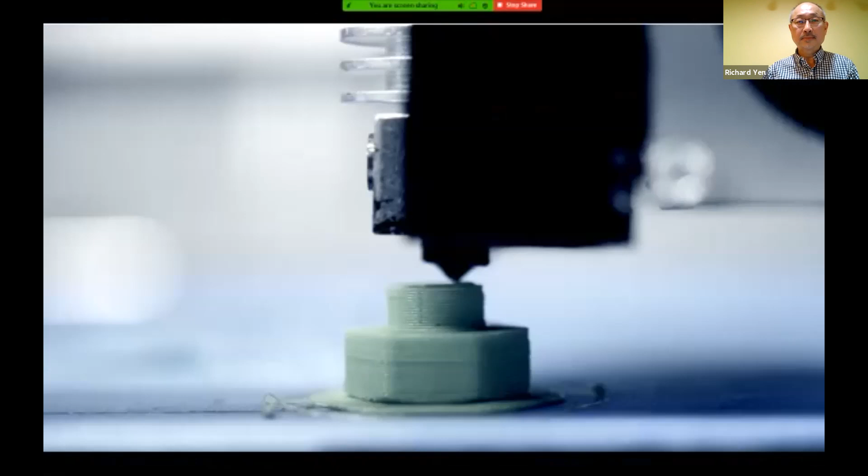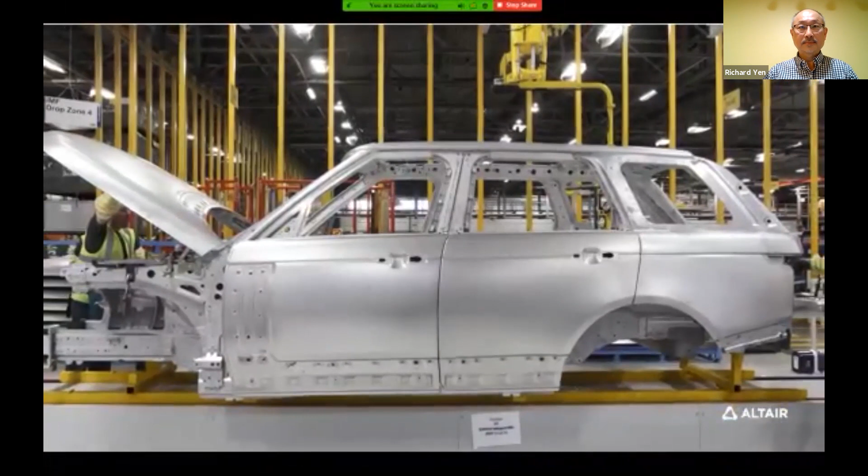I like the title Enlighten, because it enlightens us on new technologies. They're like a peer to me and to my engineering colleagues. So it's even more of an honor to have a group and a company that's made up of engineers give us an honor like this. It's important for automotive companies to reduce vehicle weight because not only do we want to give customers the cars that they want from a ride and handling point of view and an enjoyment point of view, we also want to give customers cars that meet the sustainability challenge and get better gas mileage and better CO2 reduction.

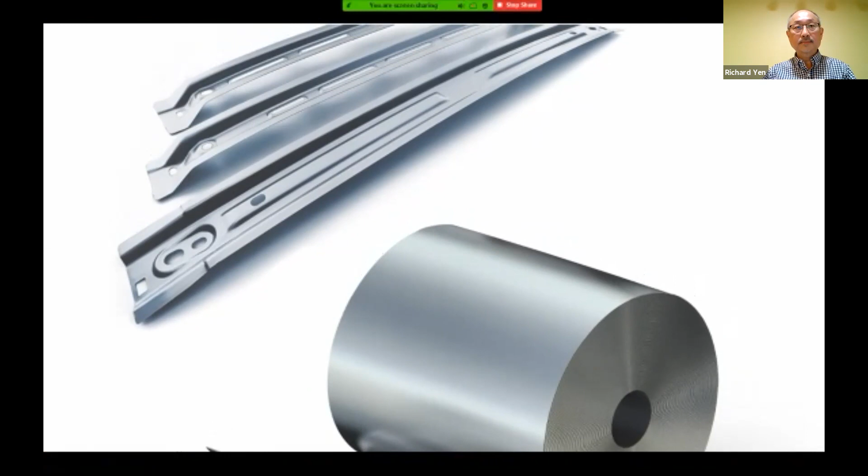We consider the Enlighten Award as the Oscar of lightweighting. So for us, we've been following that for years. We are going to brag about this to all our customers. We're putting it on our website. We're very proud of this. We have the CEO here today. So we're going to really brag about winning this award.

Thank you. So quickly, just run through today's agenda. I will use very little time to introduce Altair, then I will pass on to the panelists to talk about their stories. Today's topic focuses on the future of lightweighting and enabling technologies. Everybody understands that in order for the carmakers or OEMs to build beautiful products and really focus on lightweighting, we do need people who have a vision, and we do need the technologies to enable the OEMs or suppliers to do the lightweighting design.

With this in mind, the goal for this meeting is to run through the roundtable discussions and allow the participants or audience to ask questions. So we have all the panelists here that can answer your questions.

Just quickly to go through who is Altair and why we are doing the Altair Enlighten Award. Altair is a global technology company, and we really help customers make design decisions by leveraging the convergence of simulation, high performance cloud computing, and artificial intelligence. There are 6 pillars that really support Altair's growth, and AI is one of them. We use data analytics to build machine learning models or AI models to help the design.

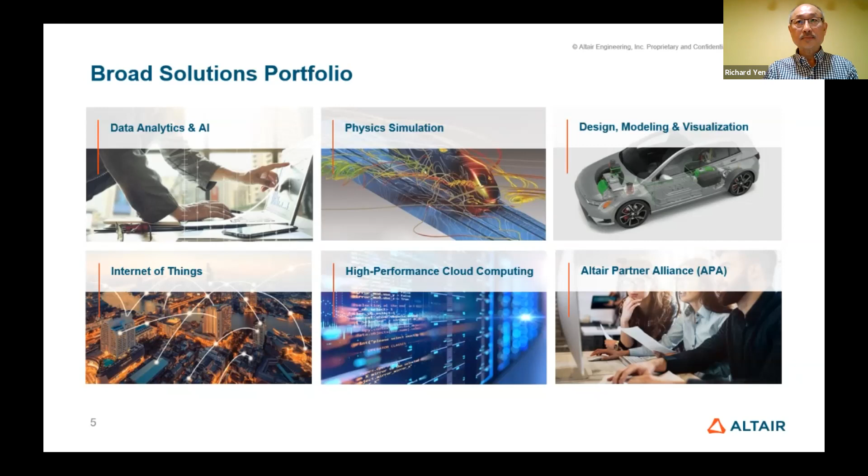So for the Altair Enlighten Award, like I have stated previously, this is the 9th year of the Altair Enlighten. We are happy with this and working with Carl. Please visit our website, the Altair Enlighten Award web pages, to look at more information. And I would like to point out that the entries close by end of May 31st. Then we have judging on June 22, and then we deliver the award on August 4th.

For this year, we try to support the government's green policies, and we believe the environment actually is more important than the lightweighting, and lightweighting is one of the important elements to support sustainability. So we added 2 new categories here. One is sustainability products, which allows the OEMs or suppliers to really focus on where they see energy efficiency, gas emissions can be saved, can be reduced, and where lightweighting can apply and increase the safety and the performance, etc.

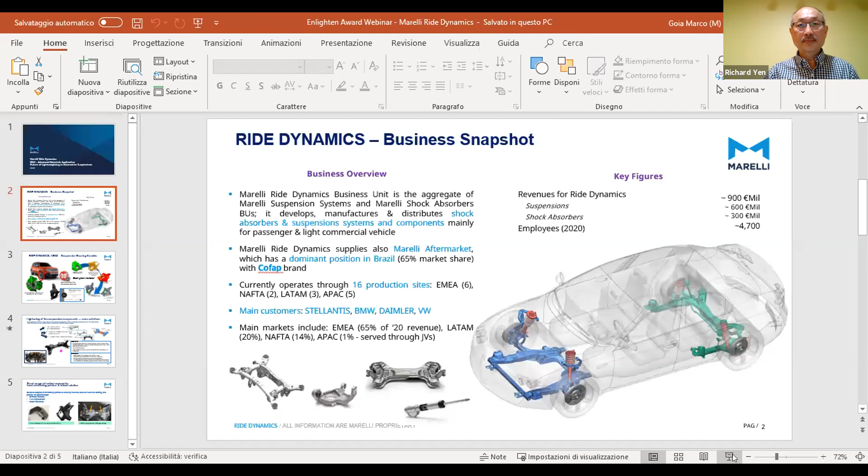Yeah, sure. So let me quickly share a few slides that will help us in discussing. Can you see my desktop? Okay. Yes. Yeah.

So as we said, Ride Dynamics, very briefly, is one of the independent companies belonging to Marelli Holding. It is the aggregate of the former business lines called suspension systems and shock absorbers. So we develop, manufacture, and distribute for high volumes, for any kind of automotive car maker, both shock absorbers and suspension components, suspension systems, suspension modules.

In brief, our global turnover is around 900 million euros, distributed 2/3 on suspension, 1/3 from shock absorber operations. We have a very strong position especially in Brazil for shock absorbers, while in general 65% of our revenues come from European operations, and our main customers are Stellantis, BMW, Daimler, and VW groups. Stellantis both by the former FCA group and by PSA, because we are historical suppliers for both sides of the newly created Stellantis.

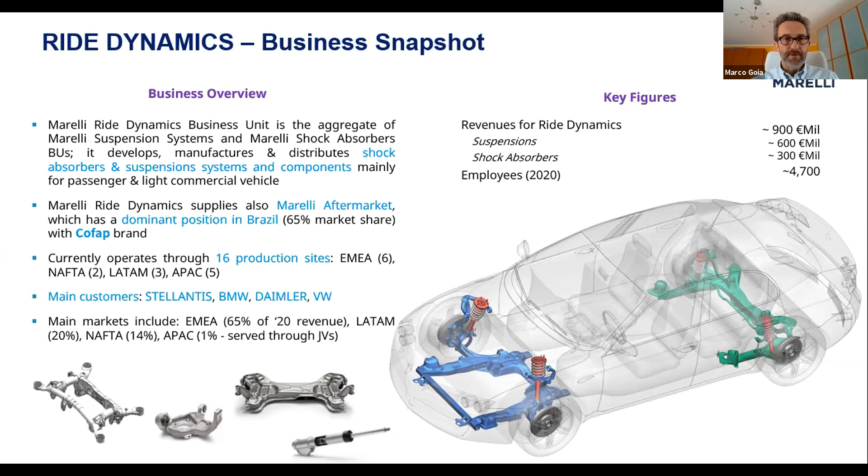Okay. So quickly, our participation in last year's Altair Awards, where we won in the future of lightweighting category. We tried to challenge ourselves with probably the most complicated component of the suspension system, the steering knuckle. The steering knuckle is where all the loads come from. The transmission of the loads from the wheel to the body passes totally through the steering knuckle. So concentration of loads, very critical design space, and so the critical side of weight reduction is totally concentrated in this component.

We ran through a deep topological optimization, material selection, and before and besides these jobs, there is a deep study and understanding of the materials, together with our partners of prepreg materials. By adopting vinyl ester and high percentage carbon fiber SMC process, we defined prototypes, and we completed the prototypes where we were able to reduce between 25 to 30% of the weight with respect to an aluminum knuckle.

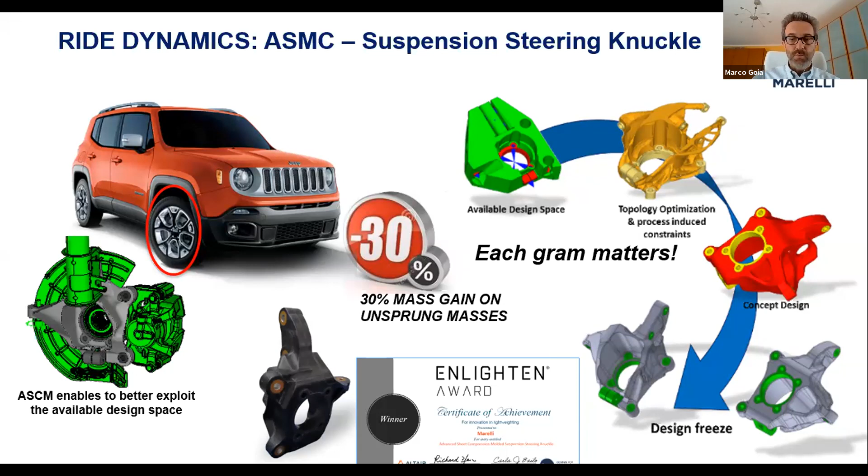And so this led to this very interesting award, and we are very proud of that award in the future of lightweighting category. But we never stop, and as I said, we are not concentrating only on the steering knuckle and only on one solution, because we believe as a suspension systems manufacturer that the mix of different solutions is the winning strategy for the future.

So we can reduce the weight of our suspension by adopting, for example, starting from the hot forming steel plus tailor-welded blank steel, just to have the thickness exactly where it is needed. Then we have solutions where we cut the weight by means of aluminum variable thickness sheet metal structures welded together. And when we want to propose to the car makers the ultimate, so the maximum weight reduction, we need to adopt carbon fiber reinforced plastics.

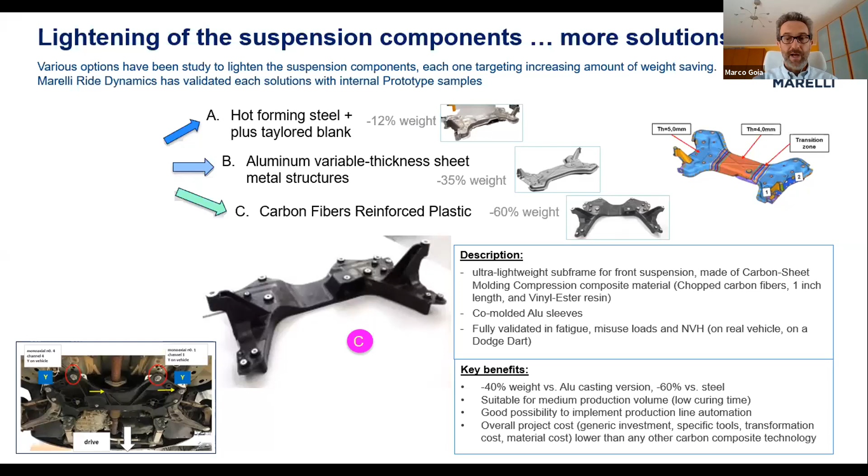So, for example, for these structures, we have developed and defined in the past years a front cross member that has been actually tested even on a car by ourselves and totally validated on the bench test with very good results. Finally, we achieve a 60% weight reduction with respect to the steel versions and 40% with respect to aluminum versions. So this is what can be done by a complete redesign of the parts.

But which are the next steps? Because we said future of lightweighting, but the future sooner or later will come. So when the future comes, you have to be prepared for the next futures. And so now we are studying local reinforcement by applying local patches of carbon composite materials onto existing structures like aluminum knuckles, or in some cases onto our structures developed in SMC, to increase locally certain specific performance, like for example on the knuckles the static stiffness and longitudinal collapse load on these cross members.

So this was just to give you a very quick idea of our participation. I want to remember that last year was not the first time we participated in these Altair Awards. Last year we won. The previous year we were just participating, but it's very important to start this path also for my people in R&D.

Okay. Thank you, Marco. Really exciting to see this. But I'm seeing you are applying more and more applications in the chassis, in very critical components, and how do you convince the OEMs to really follow this path?

Well, it's the tough side of our job, even more difficult than making the research itself. In our domain, the safety-related component domain, deep knowledge of the materials is the key driver. And so having an internal material laboratory is important to have the material card as precise as we need from a CAE perspective, but also from a testing perspective. For example, a deep fatigue campaign to have the fatigue curves and characteristics of our materials, even at different temperatures, is something we show to our customers to convince them to introduce composite materials in chassis domains. And also, to convince customers, a key factor is to propose not just one solution, but several solutions depending on the key drivers of each platform.

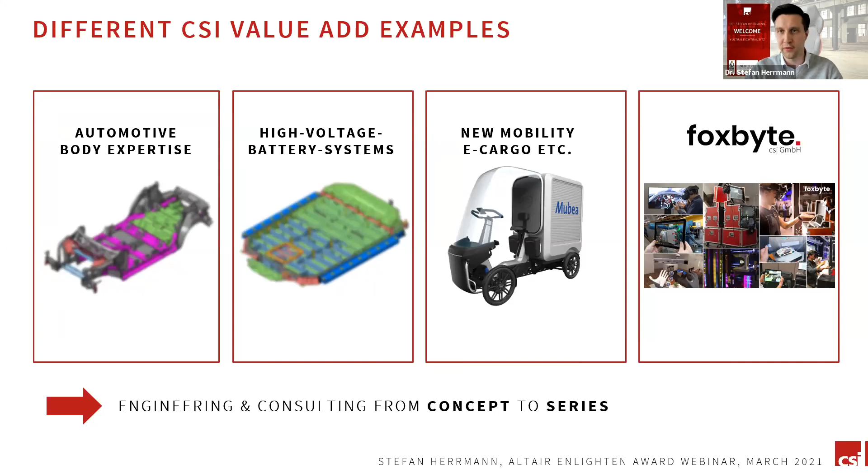And another business unit that we have is Foxbyte. They mostly deal with augmented reality and virtual reality solutions. So let's call it extended reality. So let's talk about the lightweight. We were presenting the Ultraleichtbausitz. It's a German word, which basically translates to ultra lightweight seat.

It was a partner project with different manufacturing companies like Alba Tooling, Automotive Management Consulting, and CSI in that case was in the lead. And also different companies like 3D Core suppliers, Covestro that you might know, Hofmann, and also the Lightweight Technologies Forum, for example.

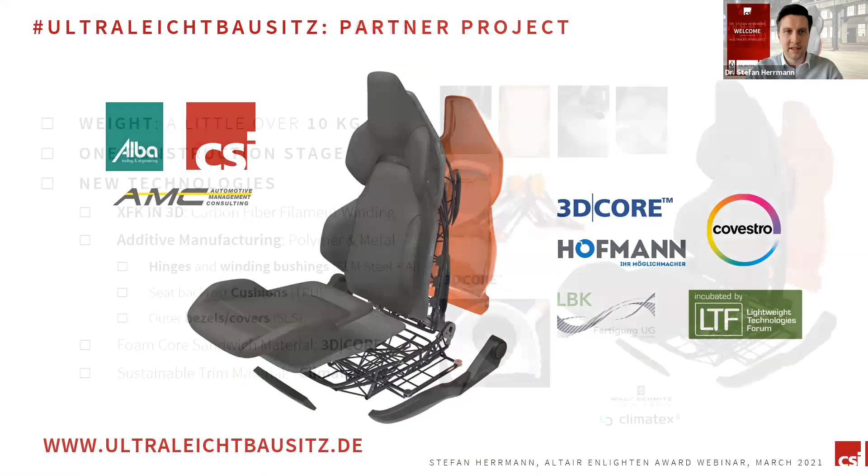So let's talk about the facts about the Ultraleichtbausitz that we did. So the weight of that seating concept was roughly a little bit over 10 kilograms. And we completely rethought the way such a seat could be designed in a completely digital process chain, majorly CAE driven in the static and dynamic domain.

It was constructed in one construction stage, and basically the new technologies that we featured were carbon fiber filament winding. So the whole seating frame has been designed from carbon fiber filament wound products. We had a lot of additive manufacturing in polymer and also metal in the different hinges, in the winding bushings, which was basically printed from steel and also from aluminum.

The whole seat backrest cushions, they have been a little bit more popularized in the meantime. So you find that in different applications now. These have been made by 3D printed thermoplastic polyurethane. And of course, the outer bezels was sort of like, let's call it standard 3D printing.

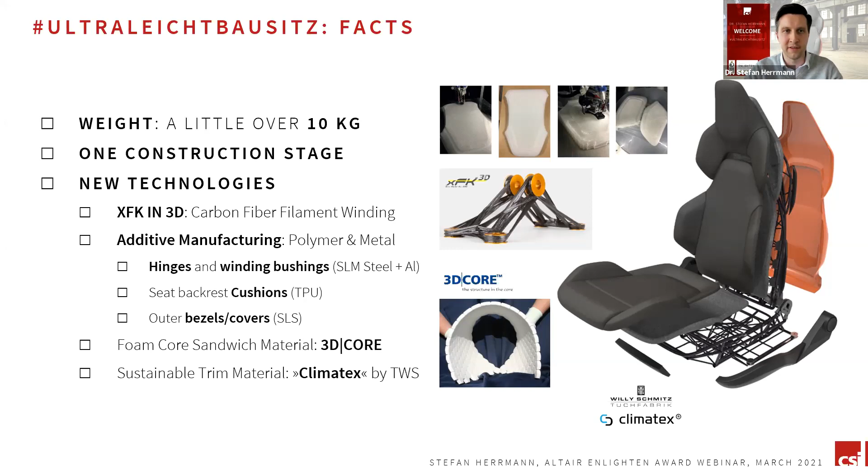The red colored back panel that you see is made by a foam core sandwich material, which is called 3D Core, also quite interesting and very, very lightweight material. And as the trim fabric, we were using a sustainable trim material that was called Climatex, which has some very interesting features regarding thermal conductivity. Okay, so I think that is more or less enough from the detail side.

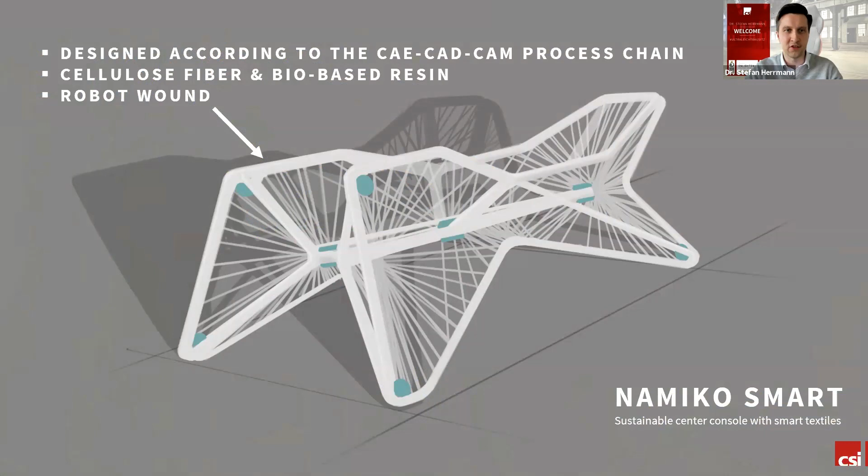So what is going to be next? The next step is going to be the sustainability. So we are going to apply these technologies also in the domain of a center console, where we have a cooperation with an OEM right now, using cellulose fibers, bio-based resins, and this is going to be robot wound. And it's also going to be purely designed with the CAE-driven process chain. It will also feature some smart textiles with different vital signs sensors and heating functions.

And if you have any questions to that, just get in touch. So feel free to ask the questions. Thank you very much. Hey, Stefan, very exciting to see these technologies. Just so curious, you integrate so many different technologies, and where do you see the integration of the technology can apply to the next directions or next application? And what is in your mind?

Yeah, it differs. When we look at the 3D printing applications, of course, it's going to be small series applications where we also look into the domain of hypercars, and also we have some interesting projects going on in the direction of interiors of air taxis. So that was also one of our aims, some interesting stuff going on there.

And so I cannot talk too much about it, but in the interior of cars, in the area of the dashboard, there's going to be some, let's say, bonded fibers, and the polyurethane seating foams. There is a lot going on in the market right now for all kind of premium and luxury cars where you can order it already. Thank you very much. I think this is exciting.

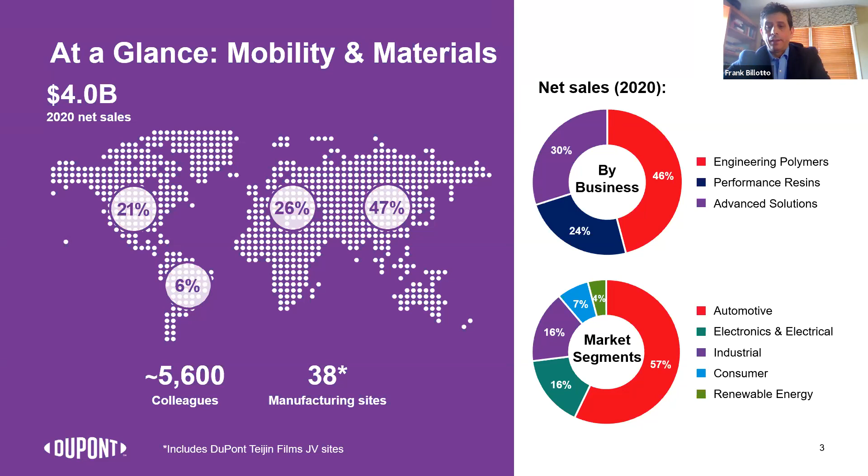Under the body heading, we were first to market 20 years ago with BETAMATE epoxy adhesive technology. These are body shop applied, heat cured, and room temperature curable metal bonding solutions for body structural reinforcement and for collision repair in the aftermarket. It also includes crash toughened or fracture toughened systems that reinforce and enable the vehicle metal structure to do more work in a dynamic impact event and contribute to the overall energy management and crash safety of the vehicle.

Our BETAFORCE systems are rapid room temperature curing and highly cross-linked structural polyurethane adhesives. These are very much structural adhesives, giving bond strengths of greater than 1,000 PSI in lap shear testing. They offer innovative solutions for joining dissimilar material combinations in general assembly, and feature a unique combination of material properties like optimized flexibility and bond strength, which makes them ideal for joining mixed materials for lightweighting.

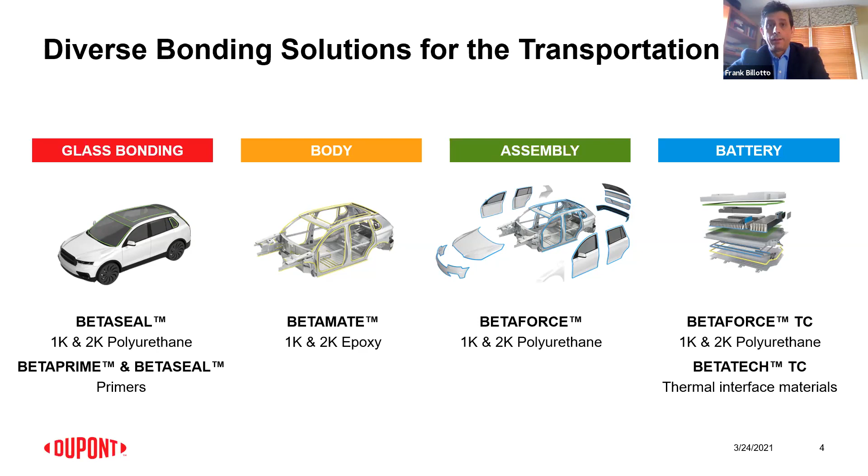And then getting to our enabling technology that we worked on together, and were recognized for last year with Altair. We were very excited to have this technology recognized at this level in the industry. This is a look at that product, and our innovation here is essentially a fast room temperature curing structural adhesive that's the primary joining means for the inner and outer panels of the thermoplastic liftgate. It's also custom formulated for compatibility with external heating methods that can be used to accelerate the cure in select areas around the perimeter of the assembly, so the part can be quickly moved downstream to other manufacturing operations or shipped out to the final OEM for assembly.

Some lightweight materials can significantly reduce the overall stiffness of structures, but the continuous bond line of the structural adhesive and the complete joining over the complex surfaces and tight radii imparts enough torsional stiffness to the thermoplastic structures that may not be achievable by other methods like plastic welding. So the BETASEAL structural adhesive provides a means of joining shaped thermoplastic inner and outer panels, enabling the modular lightweight liftgate assembly with the highest bond strength and optimal modulus. This enables new lightweight thermoplastic liftgates to achieve critical design requirements such as stiffness and fatigue strength durability required for the final product performance.

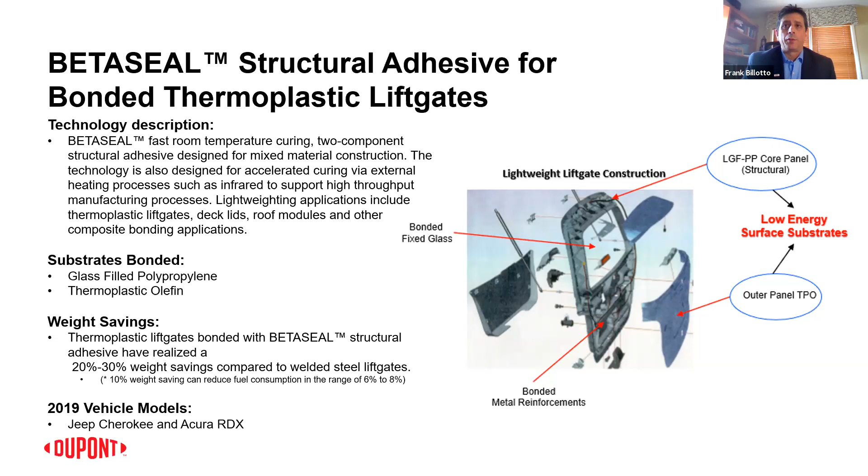And just to give everyone here a look at the future outlook for modular assembly and vehicle structures. For plastic and mixed material bonding, we're really focused on looking forward on process simplification through direct adhesion to materials and the highest cured properties like bond strength and the adhesive modulus, and then also the rapid cure capability for practical and high throughput manufacturing.

Under the structural applications of load carrying components, the key developments for our single component next generation body structural adhesives have been focused on improving the critical performance attributes such as adhesion characteristics for lightweight materials and mixed material scenarios, improved fatigue performance as you can see demonstrated here in the lower right on the fatigue curve, and also superior

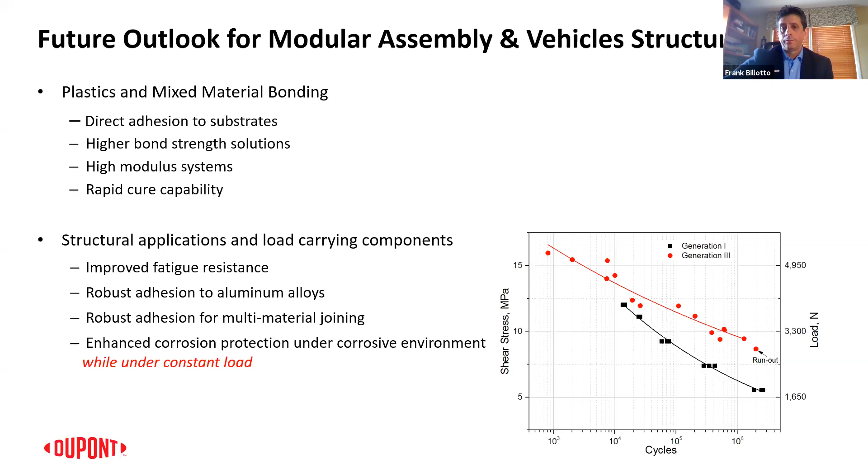corrosion resistance. These improvements will be important going forward with the shift to electric and autonomous vehicles, where there may be significantly higher use cycles experienced in those vehicles, and where enhanced bond durability can contribute to the overall vehicle longevity. And that's what I had there to share, Richard.

Thank you very much, Frank. I think you already stated what is the strength for the material. I just want to quickly ask you the question: can you highlight a couple of factors that really uniquely differentiate your material? Sure.

There are products on the market that can bond these types of, in the case we saw here, some low energy surface materials, glass-filled polypropylene and TPO, which can be very difficult to bond since they have very little surface functionality, and some steps need to be taken to enable that. But what's unique here in this material is that it has very high cured material properties.

So there are customer composite bonding specs or lightweight material specs out there that have a very high bar for the bond strength performance. And this adhesive can bond these lightweight materials and achieve those higher bond strength performance requirements. So it can meet all the OEM specifications that are out there today for composite bonding. And that's really something that differentiates it from some of the competitors that are out there in similar applications.

And then again, I would highlight here that it's specifically formulated to work with accelerated heating processes like IR, where IR is applied around select locations, and that obviously accelerates the cure. But you want to make sure that it's not too quick, or that the adhesive does covalently bond to the substrate while the polymer is forming and cross-linking. So it's a balance of formulating chemistry that our team has the know-how to do, and enables that ability to work with external heating and achieve the highest cured material properties.

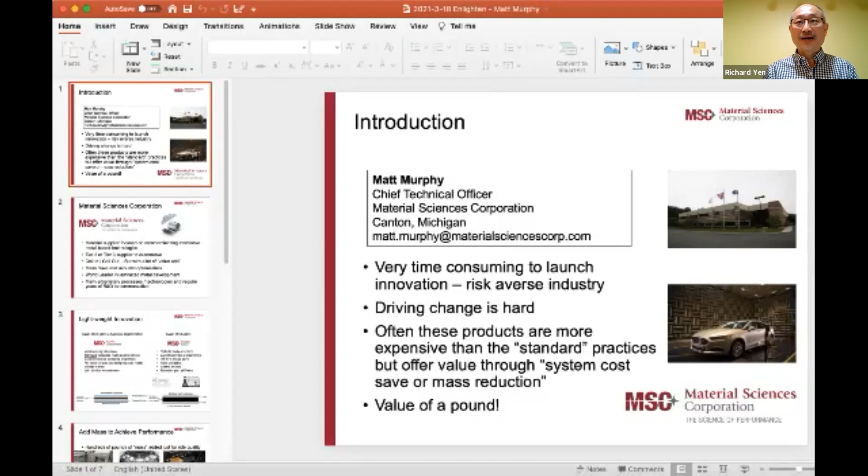I work for Material Sciences Corporation, and we won the Altair Award for our product called Smart Steel in 2019. So I'm going to talk a little bit about that, as well as another product in our portfolio that is gaining a lot of traction right now. Most of what we work on is for automotive. That's where the weight save is valued at this point.

But a couple comments on this. This industry seems to be very entrenched. I know that's changing, but from our perspective, it's a very risk-averse industry. Change is very hard, and to bring innovation in and disrupt the standard practices is very much a challenge sometimes. And we look at it from a cost standpoint, from a weight standpoint, what the customer will pay to save weight, but often at an entire system, ultimately determining what the value of saving a pound is on the vehicle.

So as I mentioned, Material Sciences, we are in the metals space. So what comes in our door is basically a coil and what goes out the door is a coil. It's just a little different when it leaves. So most of the products that we produce go through stampers around the world. They're stamped into automotive components, could be on an internal combustion engine, body in white, or more importantly now, electric vehicles.

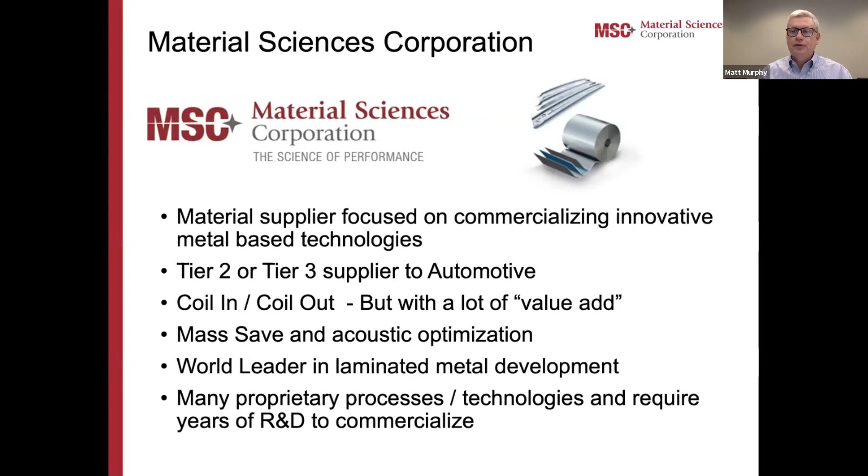Our company, Material Sciences, we are the world leader in laminated products for automotive, whether it's aluminum or steel. And all these products are things that we've developed in-house. So we have chemists that work on and test all these products here in our R&D facility in Canton. So just a little bit about the two products, and I'll talk a little bit about the applications after that.

The first side is a product we call Quiet Aluminum. You can see a cross section there. It takes two different skins of aluminum, could be 5000 series, could be 6000 series. We bond those together. Again, it comes in as a coil, leaves as a coil. This has excellent noise damping properties, outstanding. And the concept here is to eliminate the add-on treatments in a body in white. It stamps and dies, it joins very similar to aluminum.

And right now we're seeing a lot of momentum in the electric vehicle segment, but we also have activity in internal combustion engines as they move away from stamped aluminum and sometimes even plastic. Over to the right is the drop-in straight mass reduction solution we call Smart Steel. So with Quiet Aluminum, the core is very, very thin, and it's intended to basically hold the two skins of aluminum together, damping through the concept we call constrained layer damping.

With the Smart Steel, we're replacing about 40 to 50% of the cross section of the metal with a low density polymer that can be spot welded. The density of that is actually lower than aluminum. So the net result is a surface mass that is roughly 25 to 40% lower than same gauge steel. And we're targeting applications where stiffness is important, not high tensile strength. The application for the Altair Award was on the roof bows for the current Ford Escape and Lincoln Aviator that are shipped around the world.

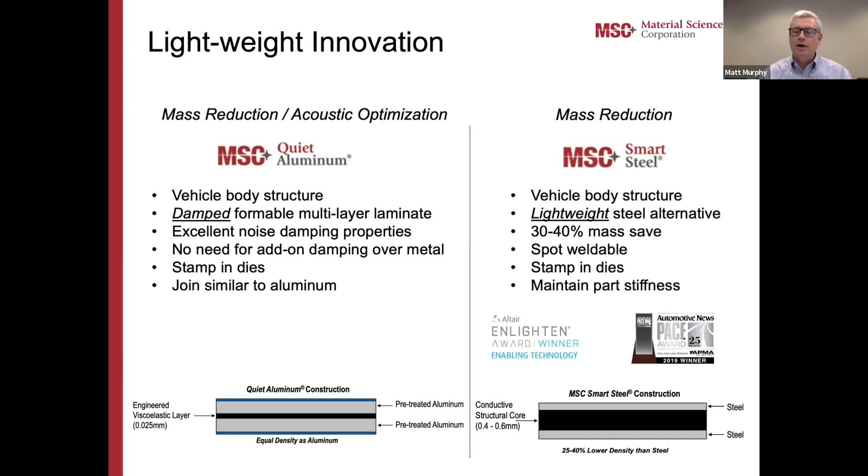Okay, so when we talk about acoustics, if you go pretty much anywhere in the world, you're going to see a lot of mass that is in these bodies to quiet them down, whether it's on the roof, the floors, the doors, the dash, a lot of mass, easily 100 pounds. Sometimes probably closing in on 200-300 pounds of mass. So with our acoustic laminate Quiet Aluminum, these are the items we're targeting, which free up mass savings as well as packaging space.

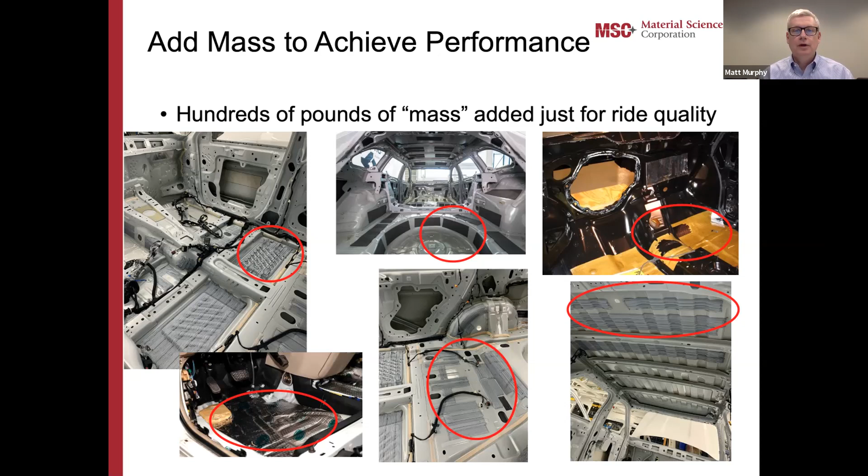So what we're doing with Quiet Aluminum is moving the damping right into the structure. So we're eliminating that need for those add-on treatments. This offers the opportunity to save a lot of weight, and we're basically eliminating the aluminum and replacing it with Quiet Aluminum. Through e-coat, through joining, all this is very feasible. This year, we are launching a very significant body in white on a new electric vehicle with 9 components in the body made of Quiet Aluminum, everything from the front to the rear of the car.

Now, I do have a demo here that I'd like to play. I hope this comes through. This is very simple. Right out behind me here, we have an NVH lab where we can pretty much test anything, but sometimes a demo is more powerful than a chart or a curve. So I'm just going to play this. So what you'll see is a stamped panel made of aluminum, and then a stamped panel made of our Quiet Aluminum.

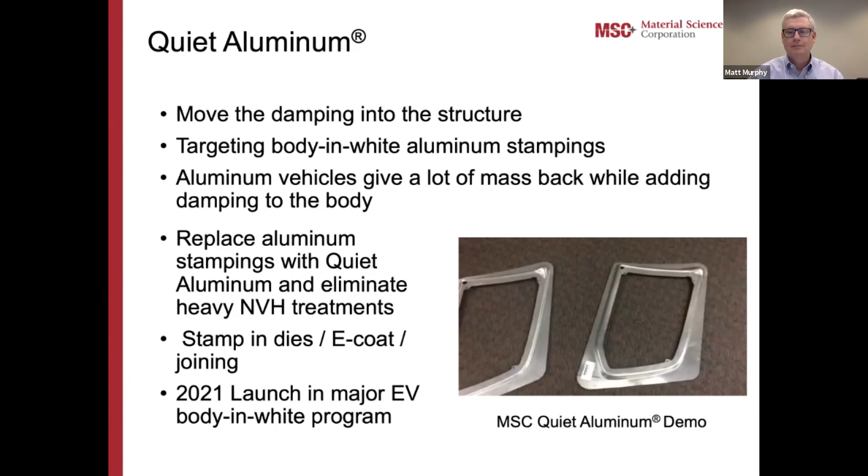Okay, so now I'd like to shift to Smart Steel. So again, this is where MSC was awarded the Enlighten Award back in 2019. The photo you see there is the body in white for the current Ford Escape. The yellow parts in the roof are the Smart Steel parts. This was a 30% mass save.

Drop in for tooling. The dies are running perfectly efficient in production today, and the assembly system with spot welding, no changes, dropped right in. So with aluminum and other mixed metals, this becomes a very complex problem when we start looking at saving weight with different materials. Smart Steel essentially allows this to drop in transparently to the production process.

And I have here $2 to save a pound. That does not mean the product is $2 a pound. That means it is priced so that it's going to cost the customer approximately $2 to save a pound, or $4 to $5 to save a kg.

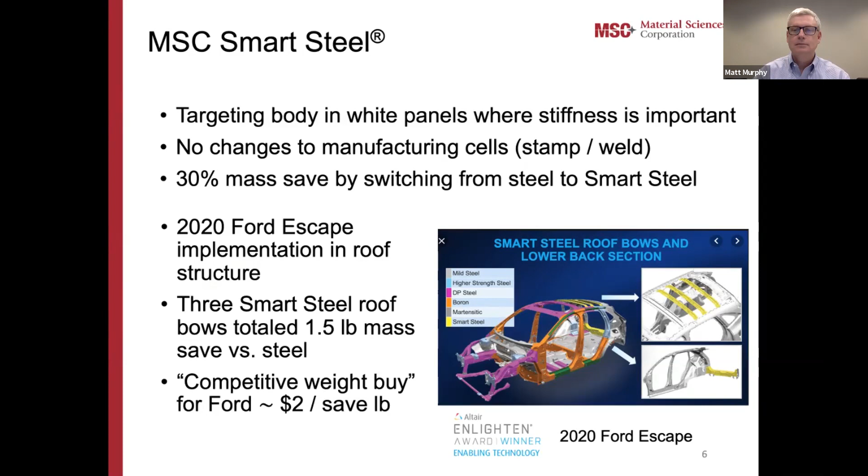All right. Thank you, Matt. Thank you very much. I have to say, I was really impressed when I received a sample from you, then when I tapped on the material, I was shocked. I thought that was not steel, just plastic. It's so quiet. But beyond automotive, where do you see this possibility can apply to? Have you explored this a little bit too?

Okay, so we sell into the appliance segment, Class 8 truck, but automotive right now seems to be where we're focusing because of volume, as well as just the need to save weight quickly. And in the body in white, these typically will last for 5-7 years. So when they design body in whites today, they have to meet weight targets 5-7 years out.

The big opportunity we're seeing, of course, quiet aluminum grows in vehicles, but the significant opportunity for MSC right now is in light duty truck bumpers for Smart Steel. We have a design of record for a light duty truck bumper. When I say truck bumper, I mean pickup truck, front or rear. Typically they're chrome or painted bumpers. We've done about 6 years of work on this.